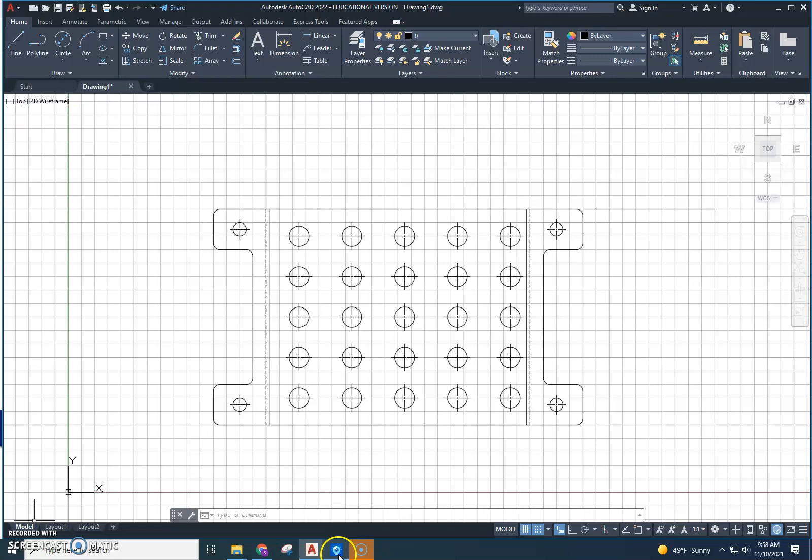Okay, so if you see here, look, these line up. And again, those dotted lines represent what we call hidden lines. If I'm looking through this piece of metal to see this edge, right? On my top view. Can you imagine that?

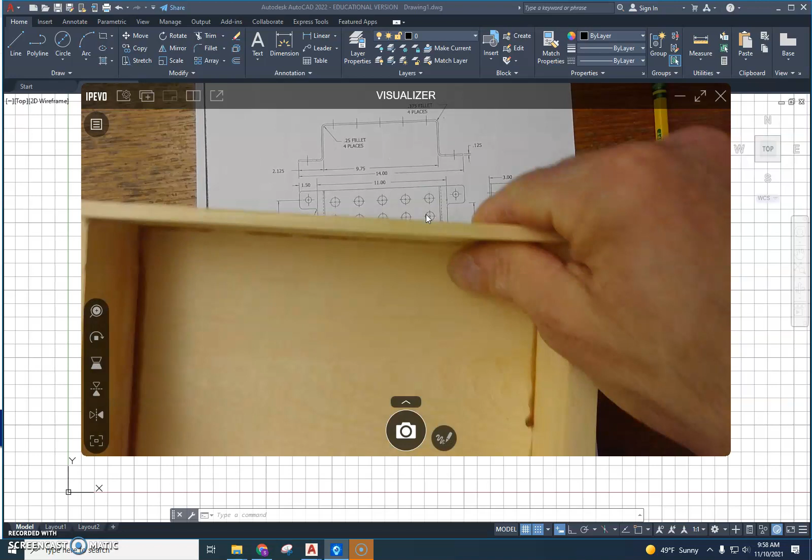So this is, and I did this on the last video, but LJ was having trouble with this the other day. Right here, that is like my top view of my box. This right here is like I flip the box up on the end. And this view right here is when I flip it this way. So there's 3 drawings, because these are only 2-dimensional drawings.

So he had an epiphany yesterday. He's like, oh, so these wings over here are up off the table. Yeah, because you can see right here, they go up, right? This part down, if you sat this on the table, this would be the bottom, and these would be the tops. Okay? So there's depth to this.

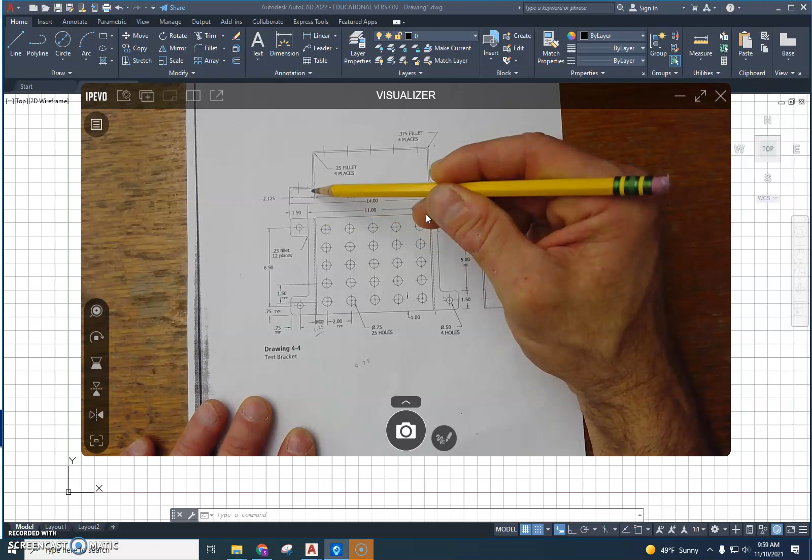So anyway, what we're doing here, those dotted lines are when you're looking through that metal to see this edge. It's called a hidden line. Over here, this dotted line is actually this edge right there. When I turn this whole thing on its side like this, I'm looking at this line right there with that dotted line. So they're dotted. So I'm going to show you how to draw this.

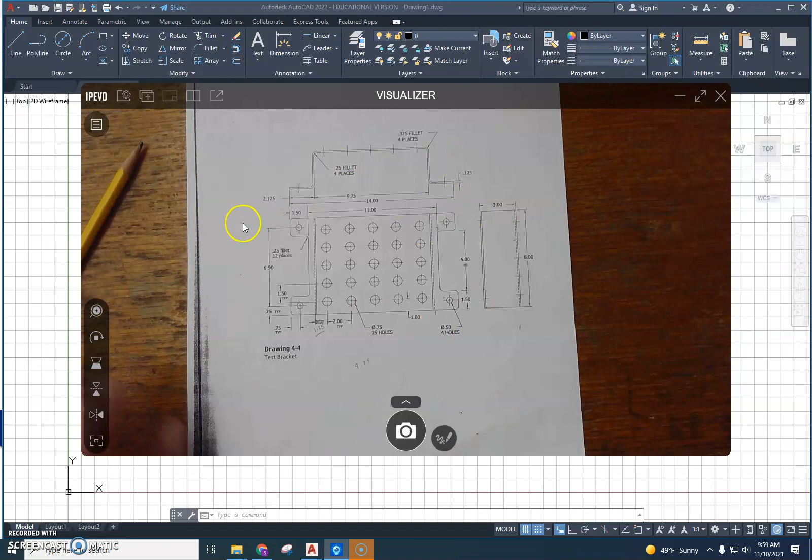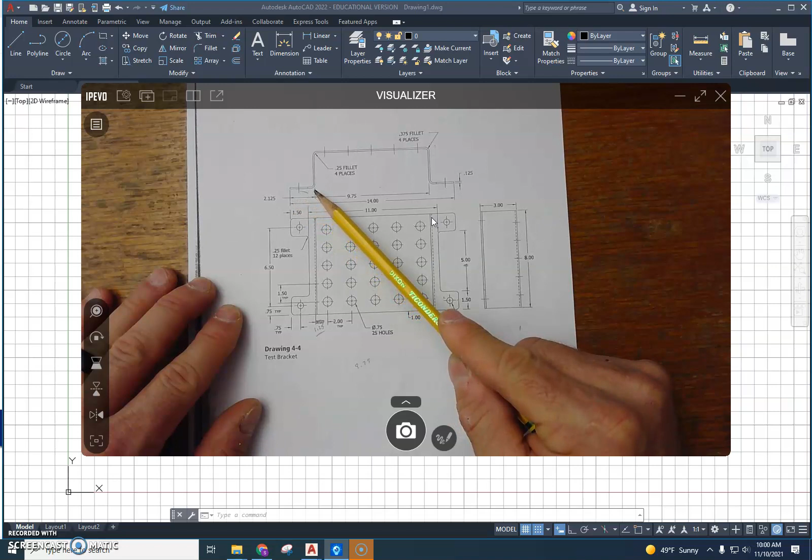First off, let's look. From here to here, 2.125, right? Tells you right there. The thickness of this metal is 0.125. So from here to this other one is going to be 2, because this thickness right here is 0.125. If from there to there is 2.125, and that is 0.125 thick, that is 2.

The other thing, you can see this thing is 3 inches in total tall. But if I'm coming up off the bottom right here to the top, I got to subtract 0.125 from that height. So from this line right here to this line right here, it's going to be 3 minus the thickness of that metal, 0.125. So it's going to be 2.875 from here to there in a straight line. Right? You guys following me?

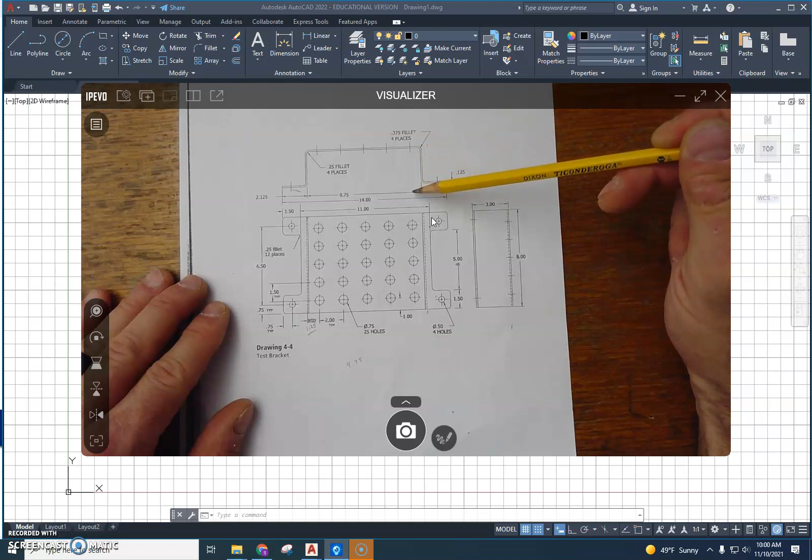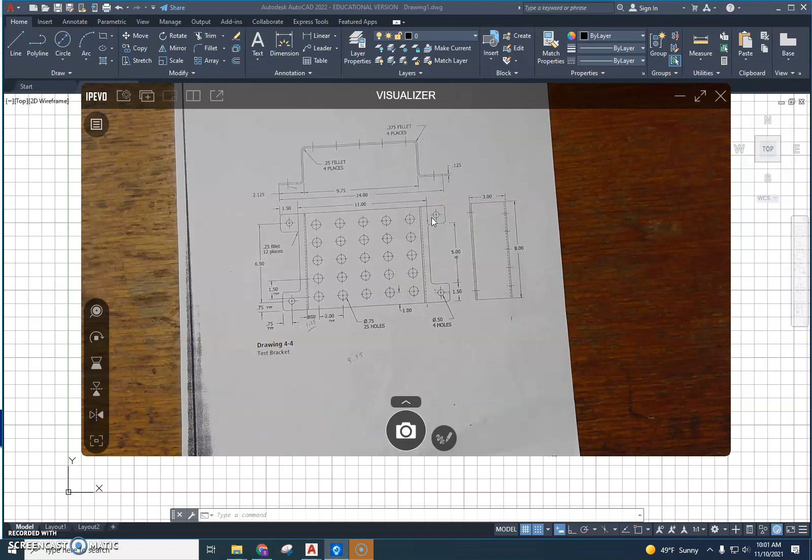This is what they expect people to be able to do. You get out in the real world, they expect you to take all these things that we teach you and actually use your brain and apply them. And you all can, you just all don't want to do it in school. I kind of get it to a degree, but that's what they're going to expect you to do. We don't teach it to you just to torture you. We teach it to you to give you a foundation to be able to go out and actually figure things out. Okay? So, here's how we're going to draw this.

We need to line them up. So what I do is just take a line command, and I come down and I line up right on that corner, and I just come up. It doesn't really matter. I'm not giving you an exact distance, but I have to be in line. Okay? So then I come here, and I said this is 2.125. So I just type 2.125, enter. And it goes over 2.125. And I'm going to draw square corners for now. Then I told you went down

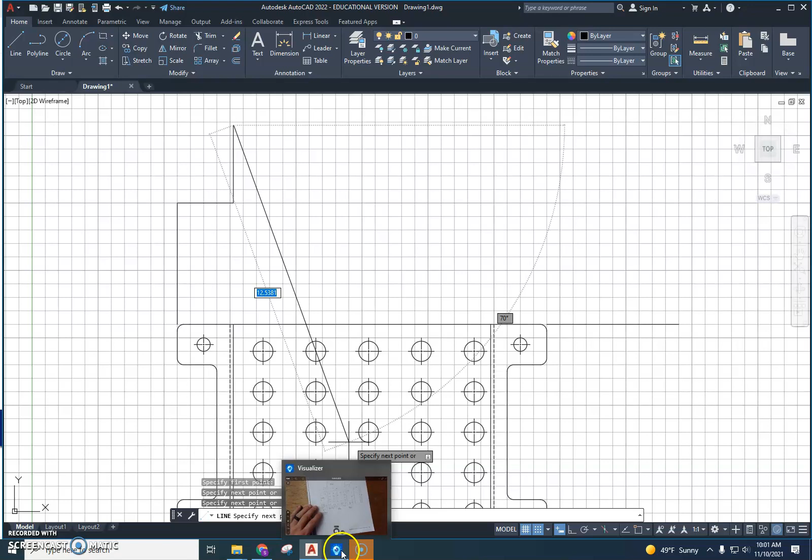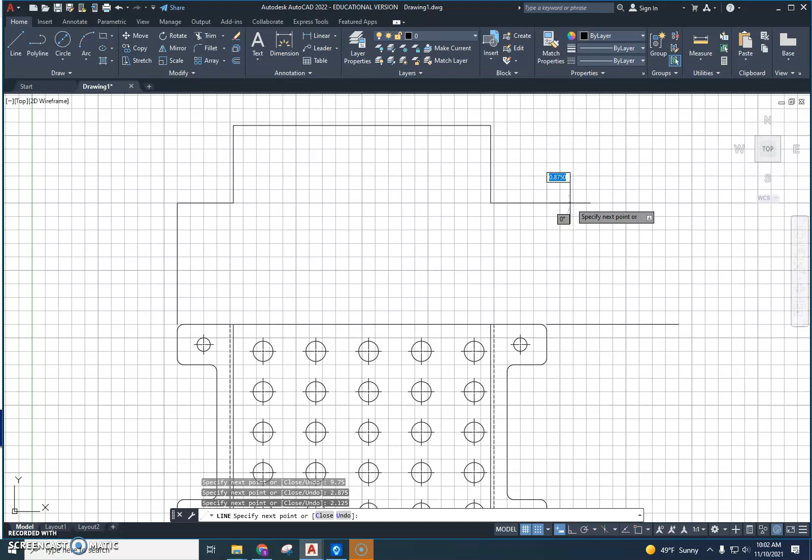2.875. Then if I go back and I look at my sheet again, right here, from inside here to inside here, it tells you right there 9.75. So I'm going to go this way, 9.75. Enter. Then I come back, my 2.875. Then I come back, my 2.125. So which edge did I just draw? Did I draw this front edge or did I draw this back edge? I drew the front edge.

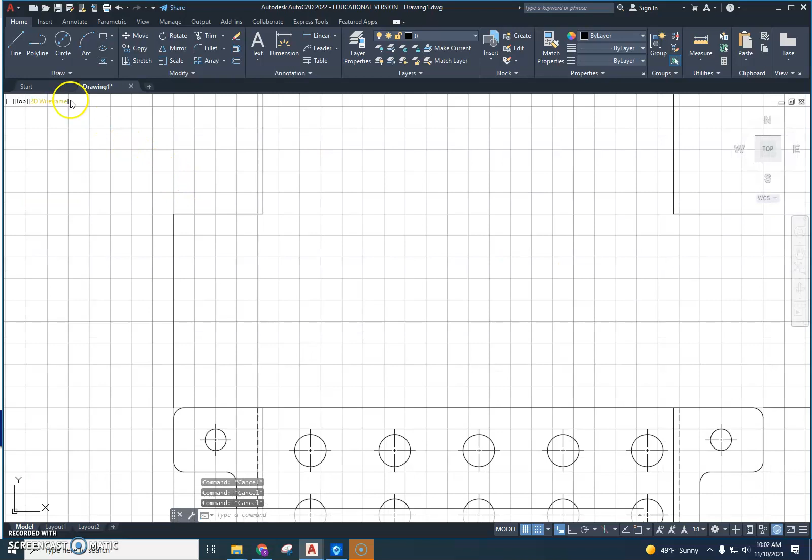Now I'm going to go draw the back edge. It's a parallel line all the way around. So I'm going to hit escape, I'm going to come here, and that is 0.125 thick. So 0.125, then I'm going to come over. I don't actually have to measure this one. I just got to stay 0.125 off the other one, right, in a parallel. See how I'm just 0.125 off of it?

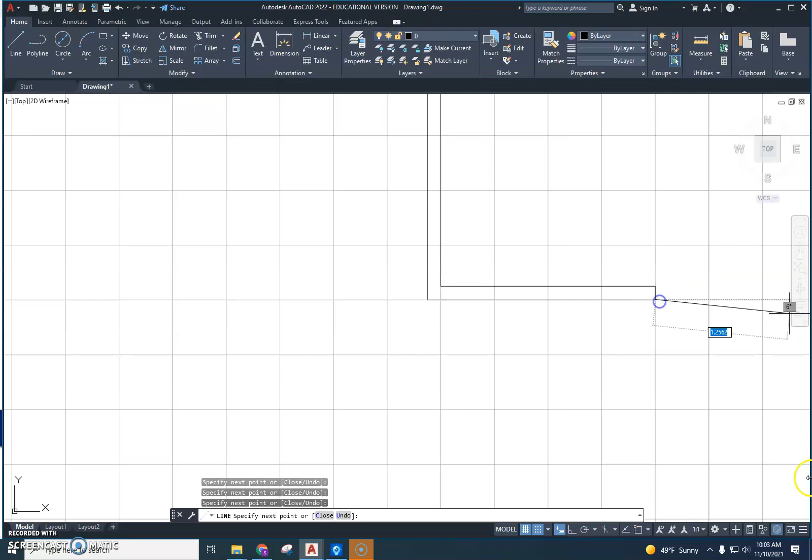And that's just one snap. And then I come to here, just like that. So now I have my general shape. Over here, it should line up with this corner, and it does. Then I can come over and I can get rid of this one because I don't need it. It was just to line them up. So that's the general shape.

Now, what do I do next, Cole? What do you think? Put the curves on my corners. These are just square corners. Those are called fillets. And if I look on my sheet, it tells you the outside fillets are 0.375 and the inside fillets are 0.25 on all of them.

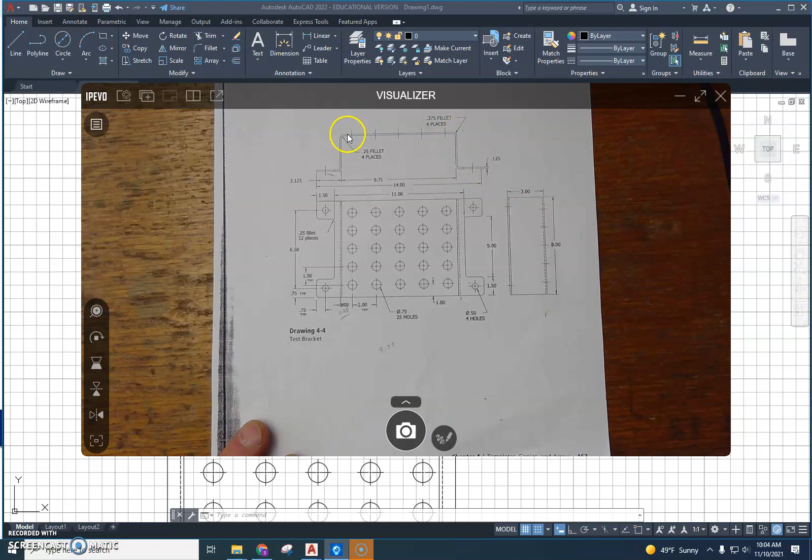So that means this is an inside one, this is an inside one, this is an inside one, and that's an inside one. All those are 0.25. That's outside, that's outside, that's outside, and that's outside. So those are 0.375. So I just come over here and I go fillet, and then it gives me this thing at the bottom of the screen.

Look. And I go radius, and I type 0.25, enter, and this makes it easier. If I just click multiple right there, those are my insides, right? So now I'm set up. And if I click that line and that line, it curves it at a 0.25 radius. There and there. My inside here and here, and my inside here and here. Then I hit escape.

Then I do it again. I go radius. What's my other radius? 0.375. Then I go multiple. Outside there and there. Outside there and there. And those look right to me. And I'm done. So I got the general shape. Now I got to draw my lines in.

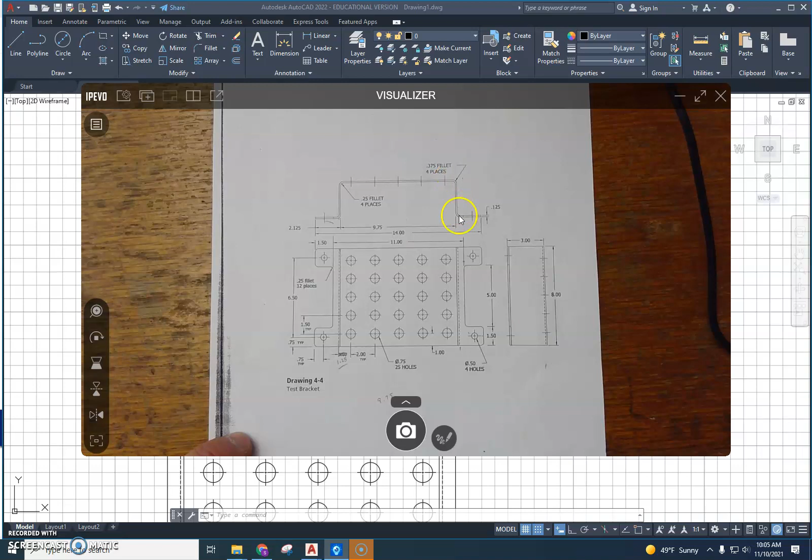If I go back and show you, these lines right here, that is the center line to those holes. That is the center line to those holes, and so forth. That is the center line to these two holes. And the other one is there's a little line right there, and there's a little line right there that represent this on this top view. So you got to get those all lined up. I'll show you an easy way to do these and a relatively easy way to do these two.

Okay? So instead of drawing, I got to make sure this is lined up. So I line up right there and I bring this straight up just so I can line it up. And there's no rule on how long this line has to be. So I'm just going to take it one square beyond each one of those like that. Oh, it's not quite long enough, is it? I just want to be even. So I go like this. I go from there to there. That looks like it's about even.

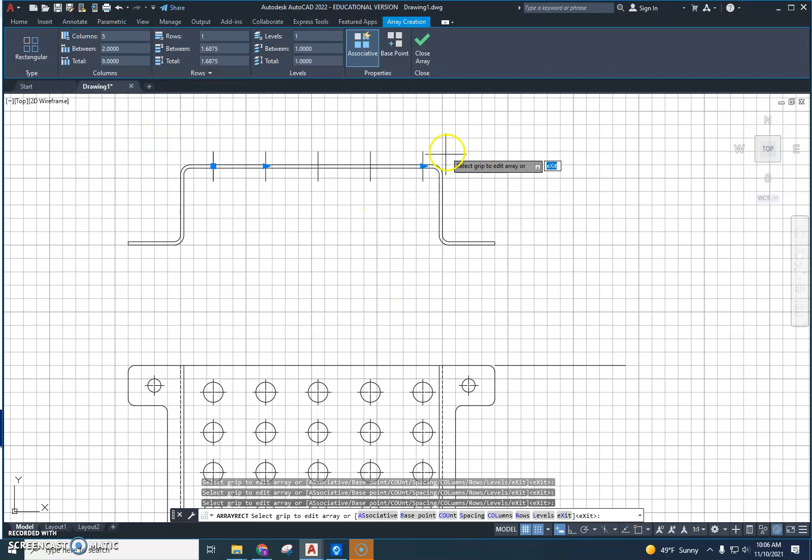And then I can get rid of this one because that was just there to line me up. That's a construction line. And I go here and I go to array. I have how many columns? 1, 2, 3, 4, 5. How many rows do I want? Just one, right? Those are going to be 2 inches apart. Those now line up with those holes. So I'm done with those.

I need one here. So I'm going to go something like that. And then I come here. I was a square above it there. And I go a square above it there. Like that. And I can do something called mirror. I already showed this to you in the video for this. But mirror, if I go right to the center, although I don't know where the center is on this, do I? Is this my center? No. I think it is, actually.

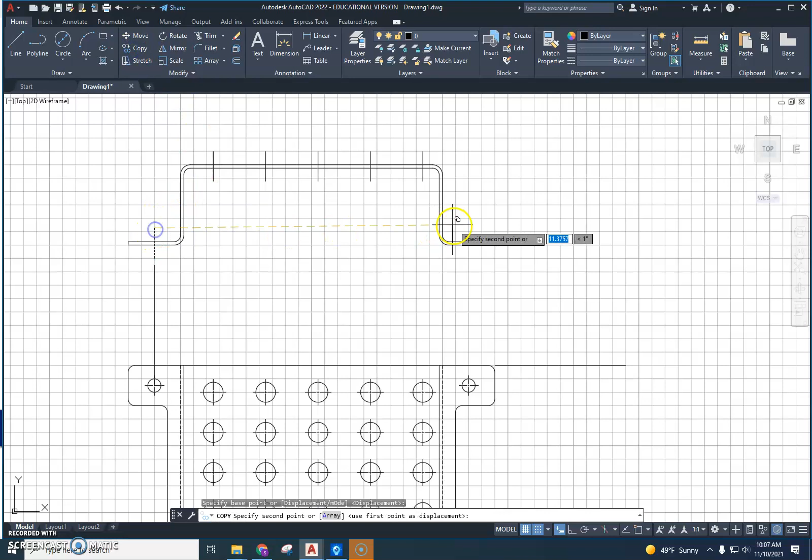It doesn't look like it, though, does it? Because your outside row is way closer to that. Yeah, I might have a problem down here. Anyway, I might have a problem down there. I would have to go back and look at that, right? But anyway, if I want to put that there, I can do it a couple ways. I'll just copy it, latch onto an end, and I want to be right there. So I got those.

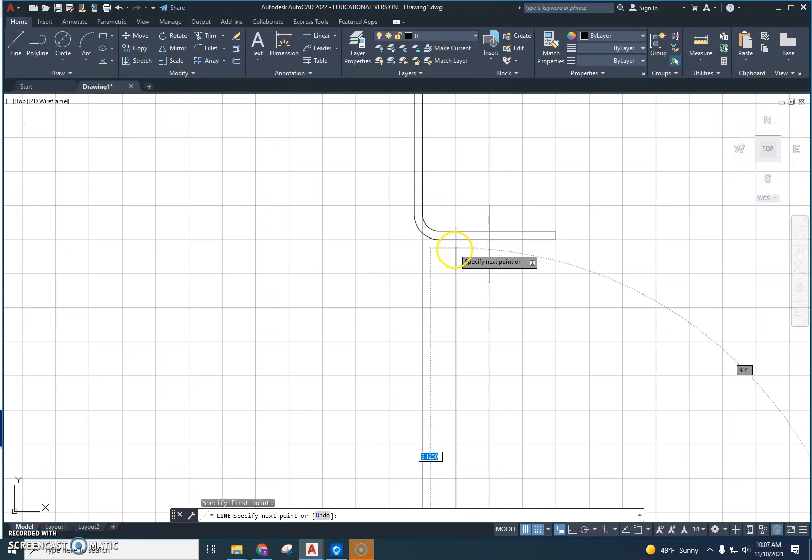Then I got this line right here that they're trying to represent. This line, I would come up and draw a line there. So I'm just going to go here. I'm going to go up. Then I can draw this line right there. And I can get rid of my lineup line, see? And I can do it over here.

So the same techniques I used on this, you can use to do this part right here. It's the same stuff. In fact, it's even easier. These are just square. You don't have to do any filleting. Line up your lines. Okay? You guys can do this. It's not that hard. Do you have to pay attention? Do you have to think?

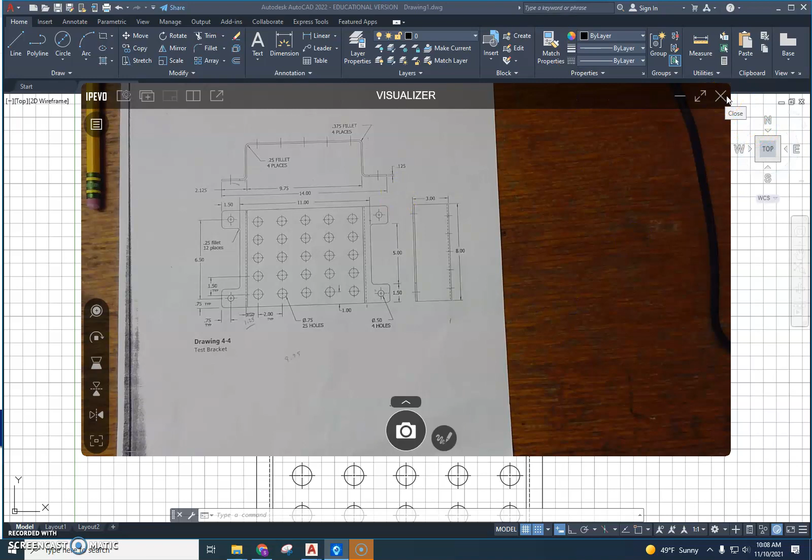Well, yeah. I mean, if we didn't challenge you in school, you guys would say, we don't challenge you. I know, because there's times I haven't challenged students and they complain. But then, this isn't super hard challenge, but you do need to pay attention and you do need to get it done. There is no clean way to teach you this. I can't just ordain you with the knowledge. This is one of those things you have to get muddy. You have to try it. You have to screw it up and then fix it to learn it. There is no clean way.

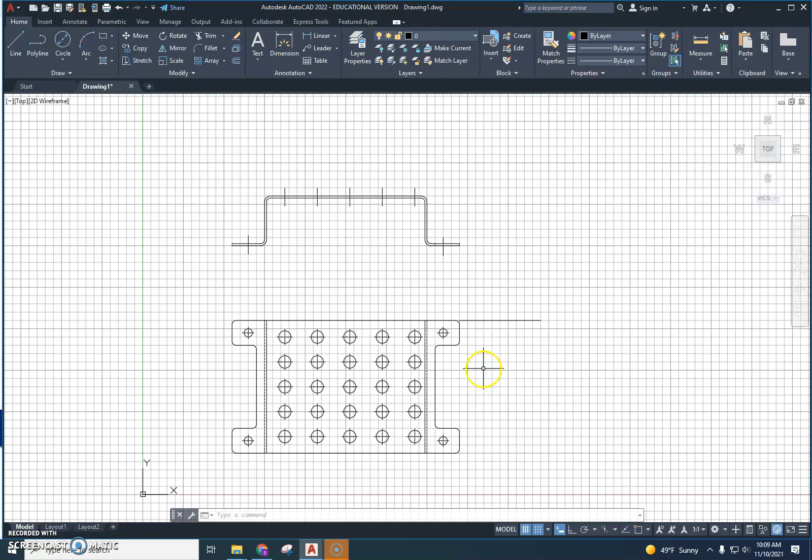It takes effort. So, the best way I can come up with is make a video. You have to put in the effort to watch the parts you need. Ask me questions. I'll answer them. I want you to finish that drawing. All right, we're done with this.

Did that not video? I don't know if that even recorded. Anyway, I did post the first one. I'm not exactly sure why it's not recording, but it did not. I don't think it recorded. I can't find it. There's the first video right there. All right. It's there. Sorry that didn't record, but I'll get it recorded. I gave you the right instructions. Cole knows how to do it. You guys should all be able to figure it out.

Okay? Cool? What drawing is this for, too? This is 4-4. This is YouTube one? 4-4. It's called the test bracket. There you go, right there. Okay? Cole, you ready to do this? I don't see it, Voigt. You don't see what? Your video for this one. I only see the 2.5 and the 4.2. Well, it's right there. I'm on it. Here, I'll do it again. Oh man. You're right. It didn't post correctly. Hold on. Sometimes it shows like it does for me, but it doesn't. So I got to go back to YouTube. Holy smokes.

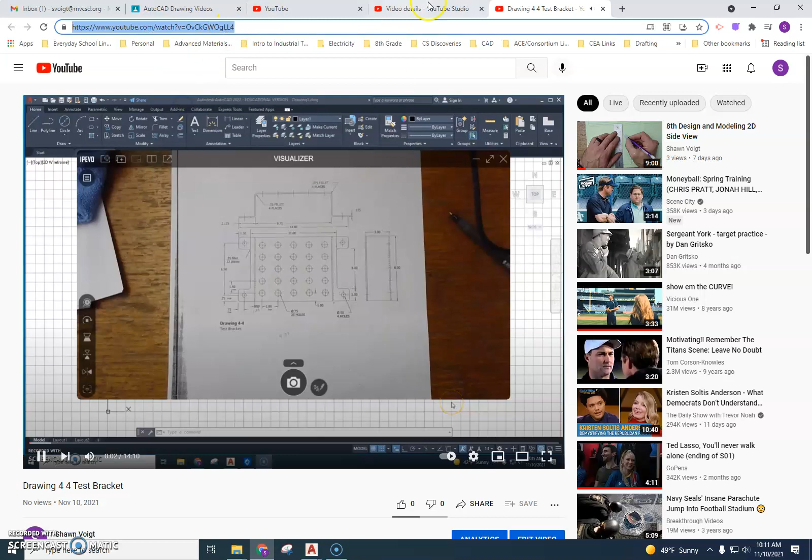Okay, so it's there now. So if I click on it and I click here, I should be able to go like this. Copy. I should be able to go here and go paste. There it is. All right, try it now. It's there. Yes. There we go, Voigt. Boy, you have 2 subscribers. That's probably me and me. You don't have 3. I don't care if people subscribe. I just want them there so you can figure it out.

Okay? If you look at this, I just want to very, very quickly, it's like taking 3 different views of this box. So you can see this is my top. I would be like looking at my box like this. This is my side view.